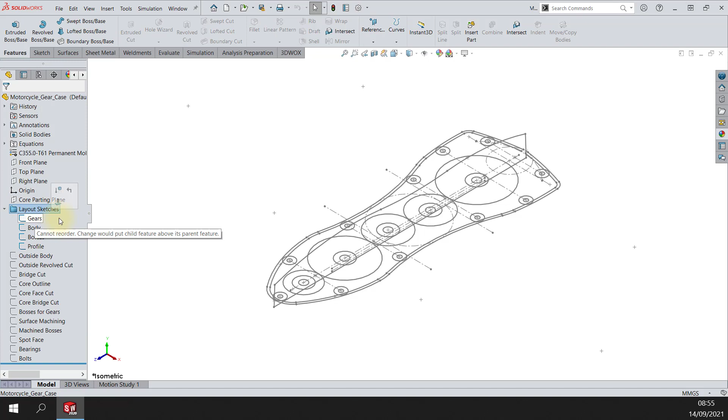So we start off with this motorcycle gear case. Here we have all the sketches done for us already. The first thing we'll do is go into this folder with the layout sketches and clear up the screen a little bit. We'll turn them off for a second while we're not using them, and then start creating a few of the profiles.

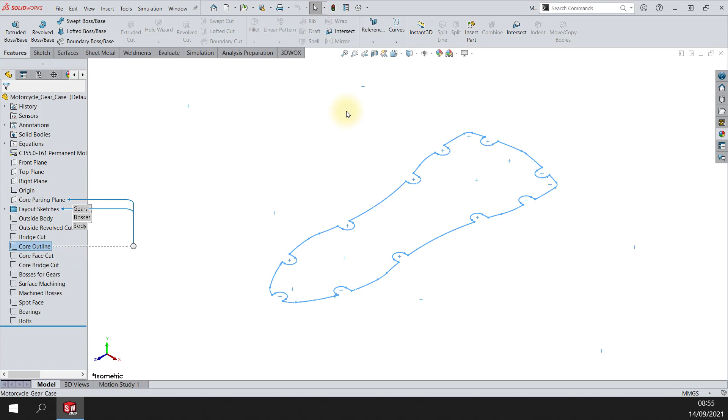So the first profile we're looking at is the core outline. If I do an extrude boss base on that, it's going to go in both directions, 50 mil upwards, with a 2 degree inward angle on that. If you flick through a few views, you can check to make sure you're going in the right direction with the angle.

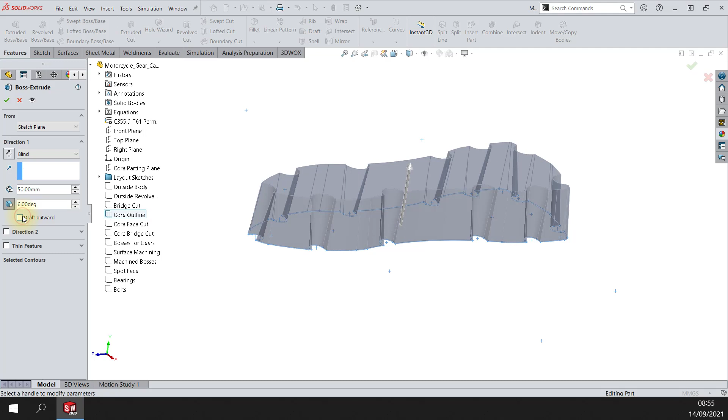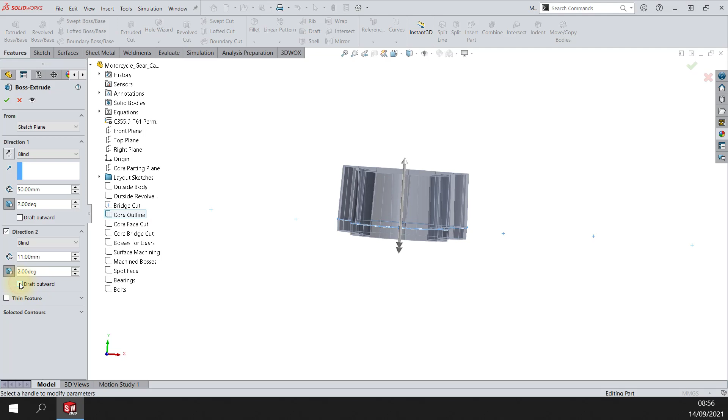2 degrees on that, and then the second direction is 11 millimeters with a 2 degree angle, and again that's an inward draft as well. So you can check and see for yourself. Inward draft, and that's that first little extrude done.

Next, we're going to do some fillets on the outside of that. We're going to apply 5 mil fillets. If I get the fillet command up and pick the edge, using the selection tool here, that'll help me pick the rest of them. You can see them all highlighted in magenta.

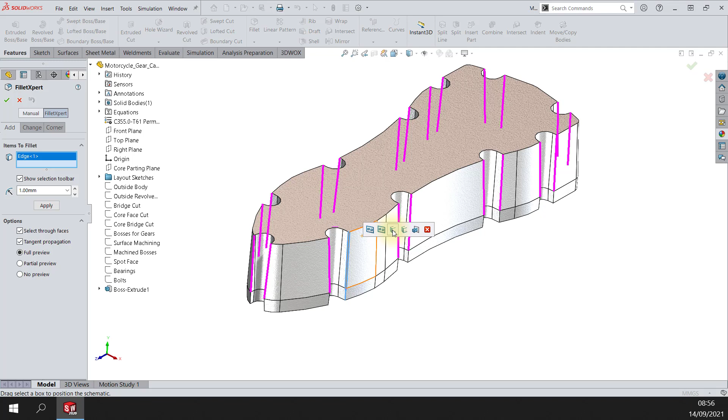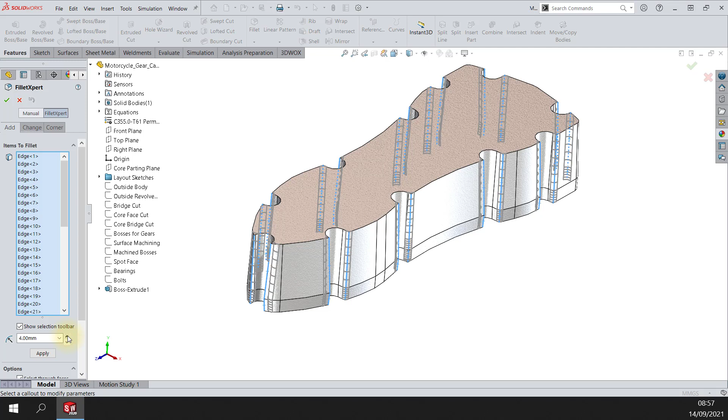So it picks those, and then I need to do the same on the bottom half of this. Select that, and again select those running around the bottom, and click OK on that. Sorry, just change my fillet to 5 mil before I do that, and apply it - that's those fillets around the outside done.

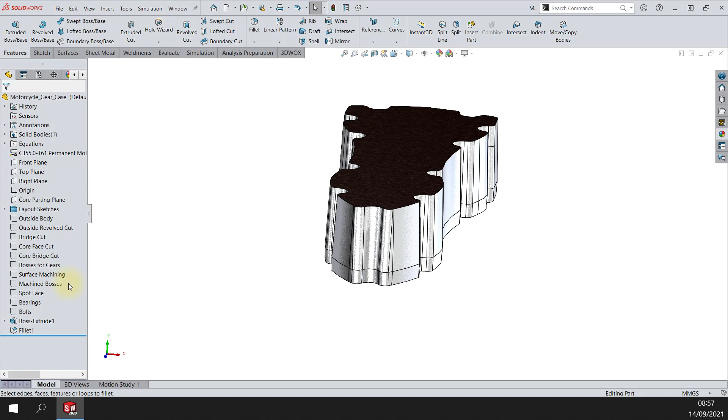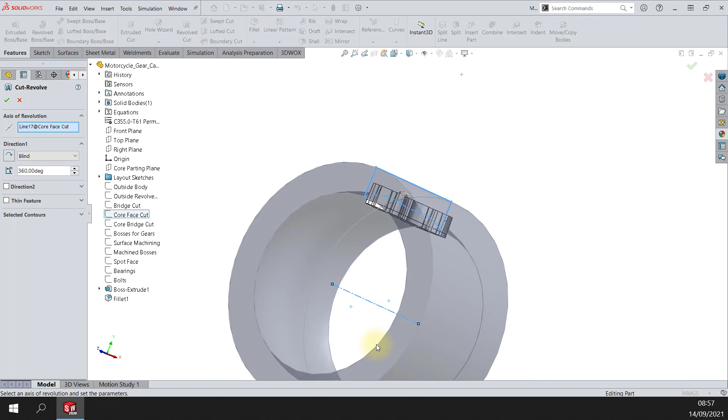Next we're going to do a little revolve cut across the top of this, using the face - the core face cut. We're going to revolve that around. You see it takes a fair whack off the top. You can pre-select the sketch and then do a revolve cut. It doesn't matter if you do it full 360 or 180 or anything, because it's not going to interfere with anything else. So, happy enough with that, click on that, and it gives me that revolve profile around the top.

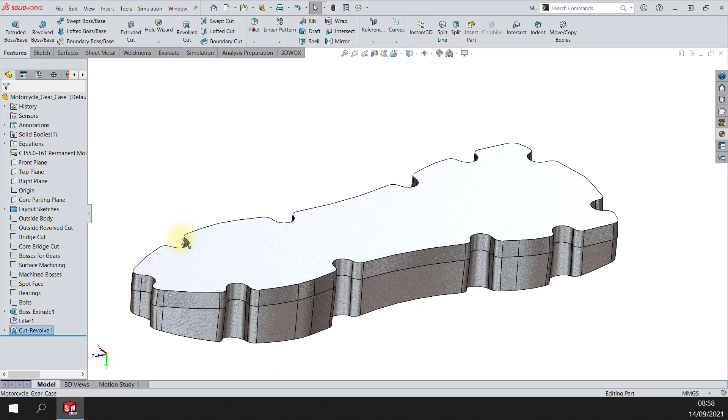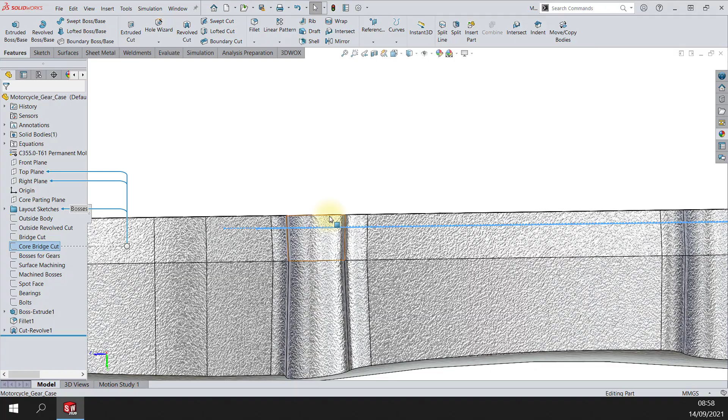Then flipping down on the bottom side, we're going to use the core bridge cut, which is buried into this a little bit. We're going to go in 2 directions - up this way and down a little bit. The upwards direction, and through all downwards, since this is now upside down. So the through all downwards is because I just flipped it. Looks like it's that upwards.

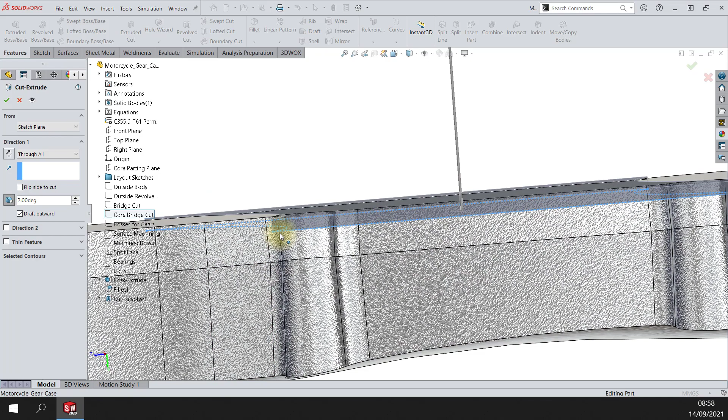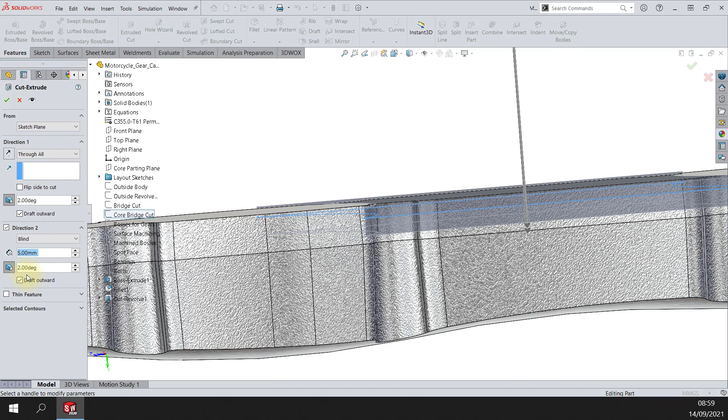So let's go to extruded cut, and that one is going to be through all, with a 2 degree draft, and this one's going to draft outwards. You can see that drafting outwards on that. Direction 2 then is going to be 5 mil, a blind cut, and again that's only 2 degrees. This one's going to be drafted inwards so you get a smooth line running up, all in line, so you're not going to get a step - you can just go straight in at that angle. Click OK, and that's the extruded cut done.

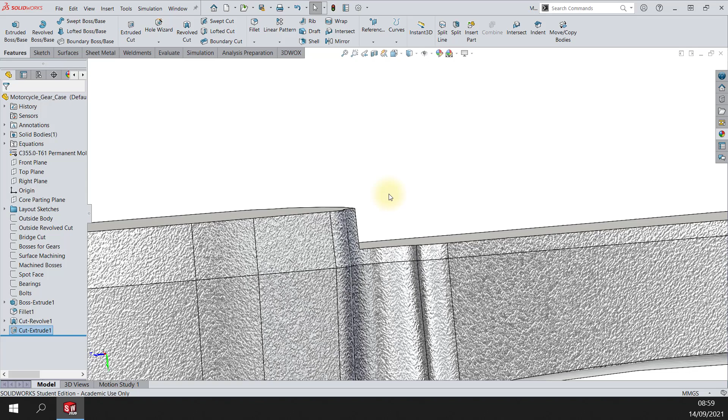So next, if I spin it around back to the top half of this, we're going to do the bosses for gears. These are buried into this as well, and again it's another extruded cut on that.

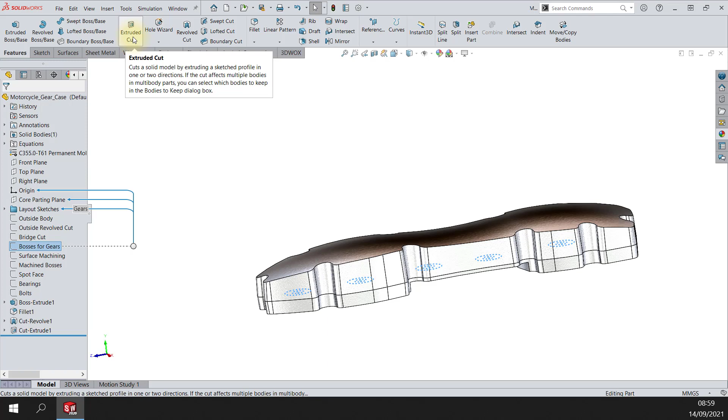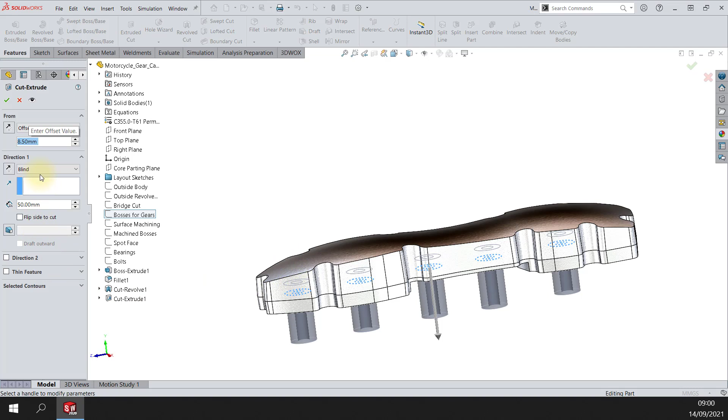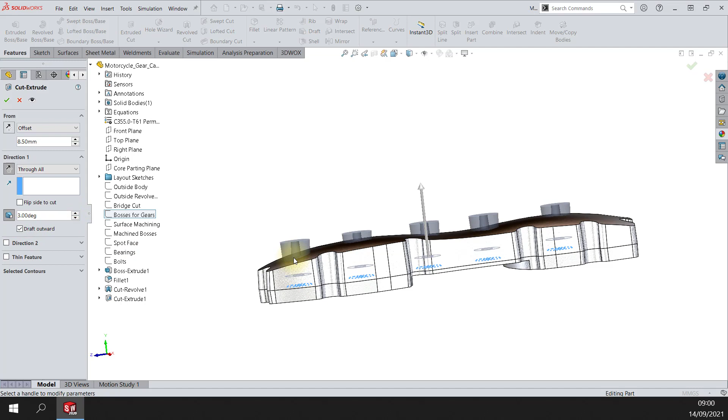So we're going to do an extruded cut, and it's going to be through all, but first it's going to be offset from this. So offset, at a distance of 8.5 there, and it's going up in that direction. Then I'm going to flip that, through all, because it's going to come up through that part in that direction. It's up 8.5 from where that is, but it's going to come up through all in that direction. And then there's a little draft on this as well, a draft of 3 degrees, and it's an outward draft, so make sure it's going outwards on that. Okay, so click on that.

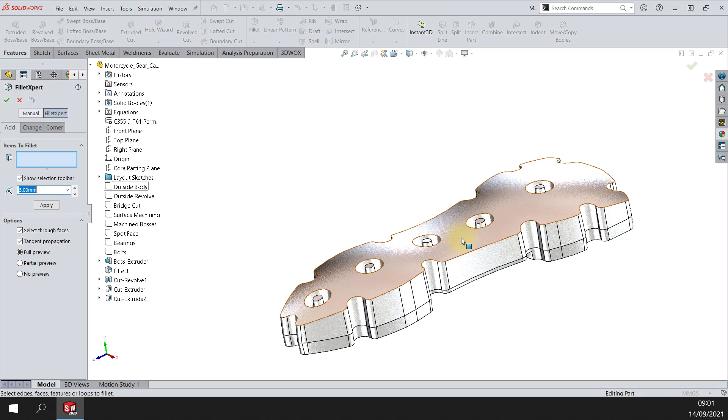It gives me that. Then coming down, we're looking at applying 5mm fillets to this. So we got the fillet command, 5mm fillets, and on the top face I think I can pick just a face and apply all those fillets to the top half of that. Yeah, so that gives me all that around the holes and all that as well. So selecting the face does that for me.

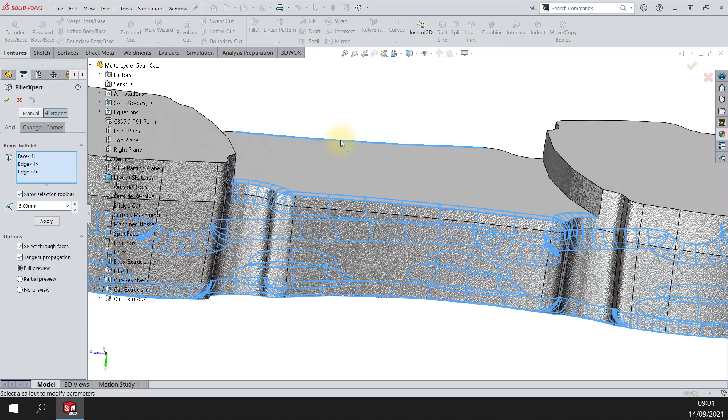And then the bottom side, we're going to just pick on the edge. So just make sure you get the edge on that, and do the same on the far side. You can always apply that and have a little look and check it out, and if not, you can right click on the feature and go back into it and add or delete any of the edges that you might have got wrong. So don't be afraid to do that, but I think that's okay.

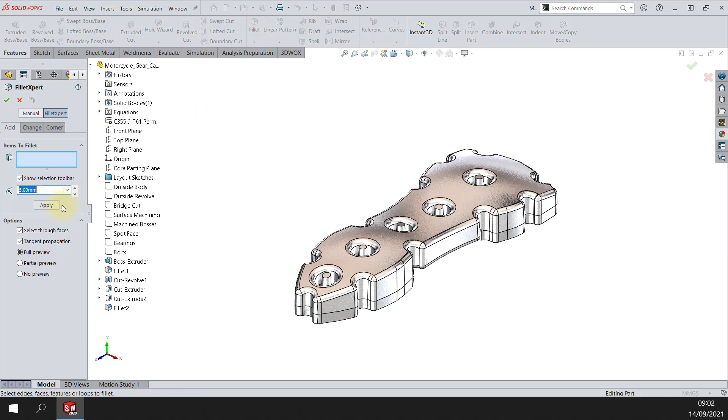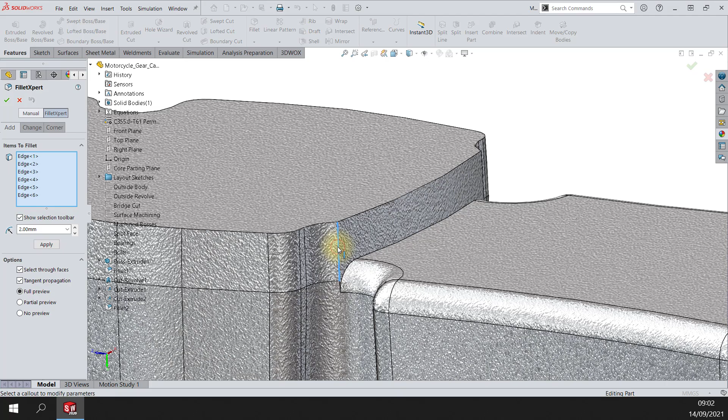Then moving down, we're going to apply a couple more 2mm fillets. So again, the fillet command. I just pick up those little edges, you can pick on the face or the edges as well, same difference. Then spin it around here, and we're going to just pick here on this. So there, and there. Apply that. That's my 2mm fillets on those.

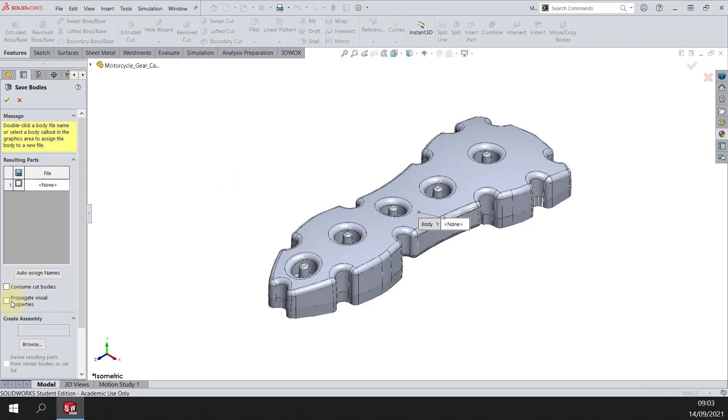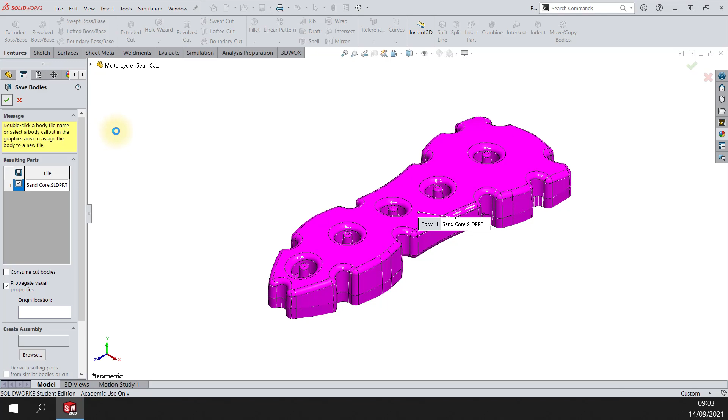It's magic to get it back on that. And that's that one. We're going to save that body and name it as Sand Core. I'll actually name it here as well, Sand Core. And we're going to save that body, so save bodies, and we're going to save it out. Don't forget to propagate visual properties as well. We're going to save it out as Sand Core, and you can see it's already got the name in there. That's what I've done before. So I'll replace that one with that, and we've got that Sand Core. Click OK on that, and that's that one done.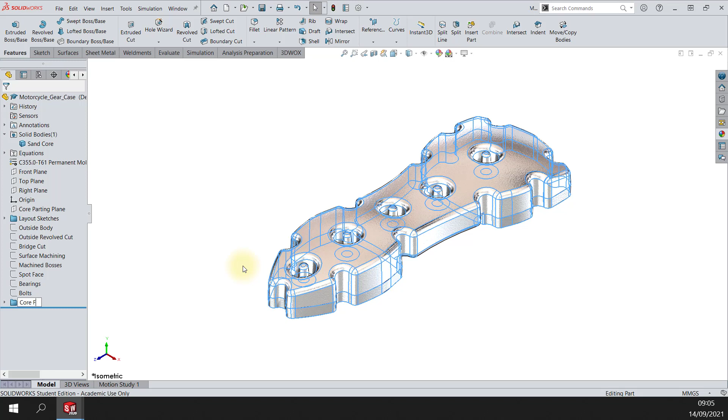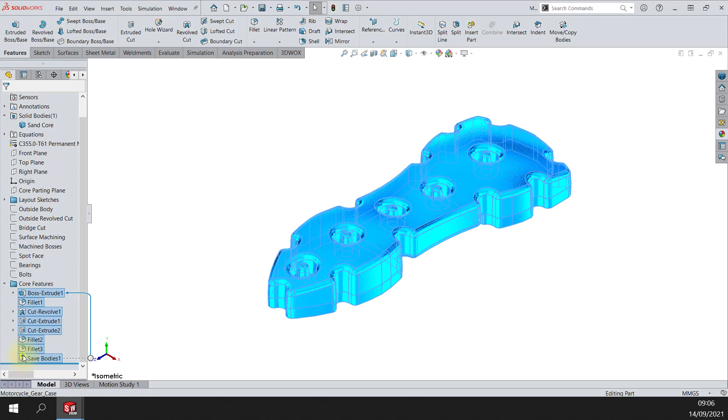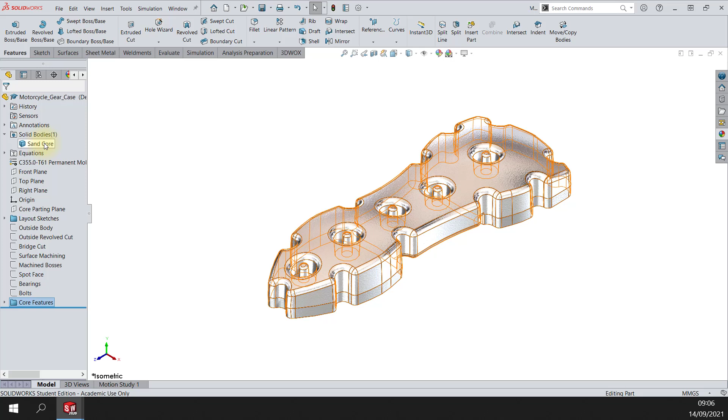So once we've got all them done, we're going to pop all them into a little folder. If I just select all those items and right click and add to new folder, and we're going to call this one core features. So there we go, pop all them into that. That keeps all them in there safe. I'm going to pop in with that core features, and I'm going to just turn off all of those, hide all those features there. So let's hide the sand core now, that clears that and gets it out of the way.

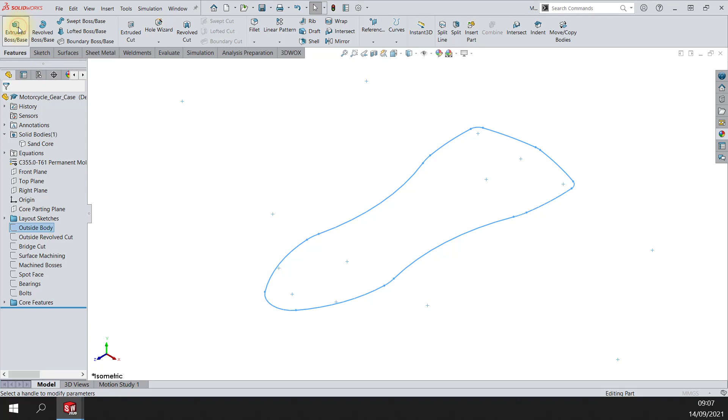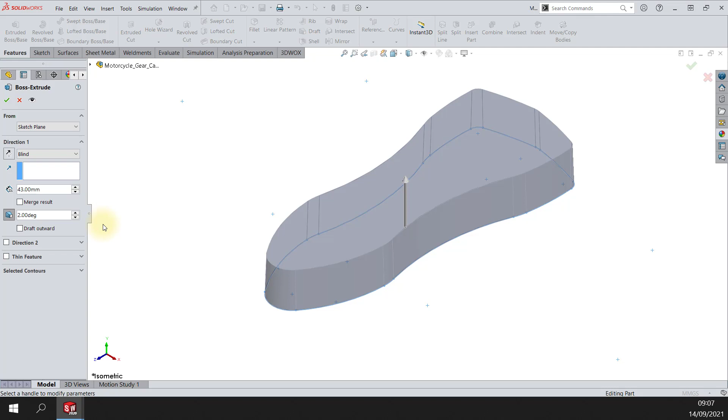So next then we'll have a little look at creating the next part, so it's the outside body. We're going to extrude that again, and it's 43 upwards, so 43 up. And again it's a draft angle of 2 degrees on that, and it's draft inwards. Then the direction 2 is 11 mil, so 11 mil units on that. This one's going to be draft outwards, so it's all going in the one direction, draft inward on the up direction and outward on the down direction.

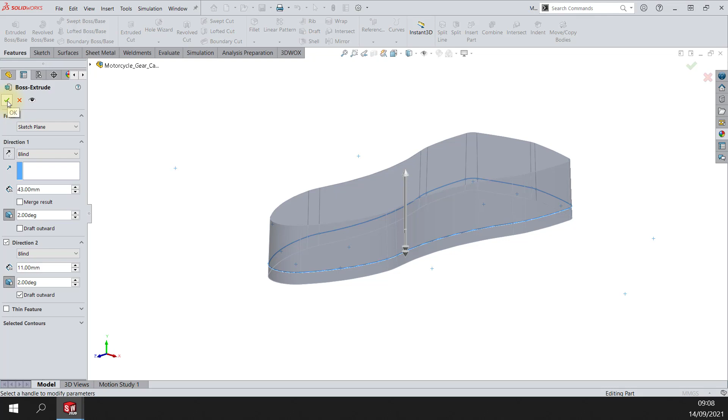Make sure you've cleared the merge result box if necessary, so you don't want to merge them with the other solid. So click OK on that, and that gets that one done. And again we're going to do our little outside revolve cut on that. So I can pre-select that, do a revolve cut, same story as the last time. Doesn't matter if we do 360 on it, won't affect anything else. So that's us done at that.

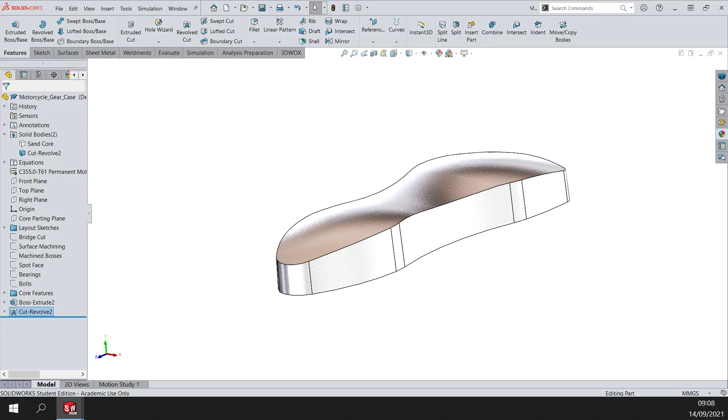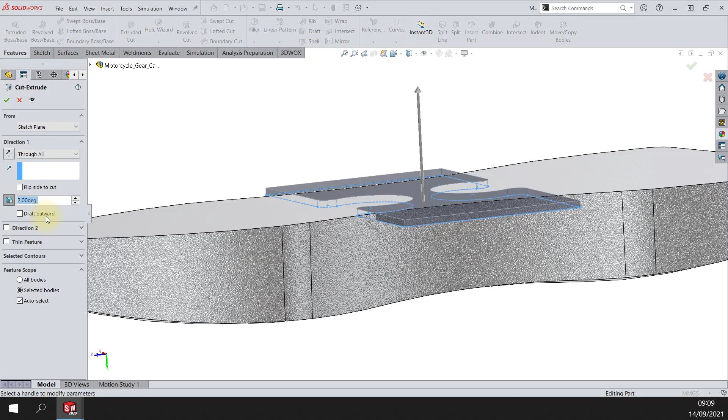Spin it around, and we've got a bridge cut then. Again it's kind of buried into it, so we've got a couple of different directions to go. So I'm going to go through all in that direction, and again a draft, it's a 2 degrees draft here, and it's a draft outwards on that. So let's check that, see that? So just check that you're drafting outwards.

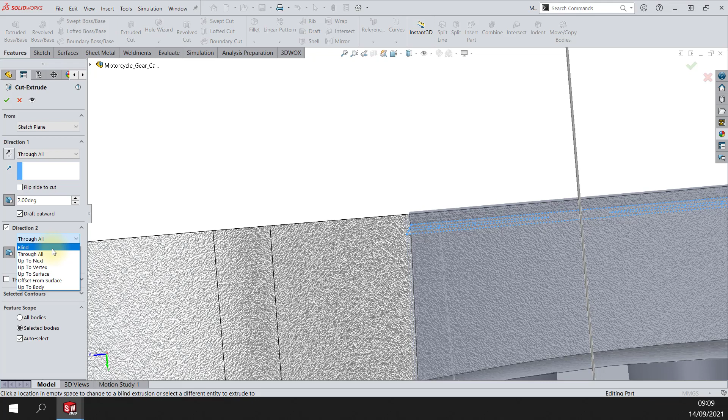Direction 2 then is a 2 mil cut, so it's blind 2 mil cut, and again it's draft, this time it's draft inwards. Again, you've got to keep it going in the same line. That one's going out, that one's going in, so you get the same angle of approach, if you like, on that. So click OK on that.

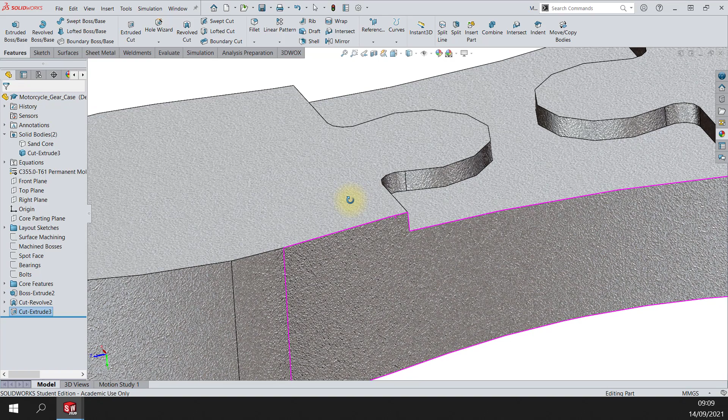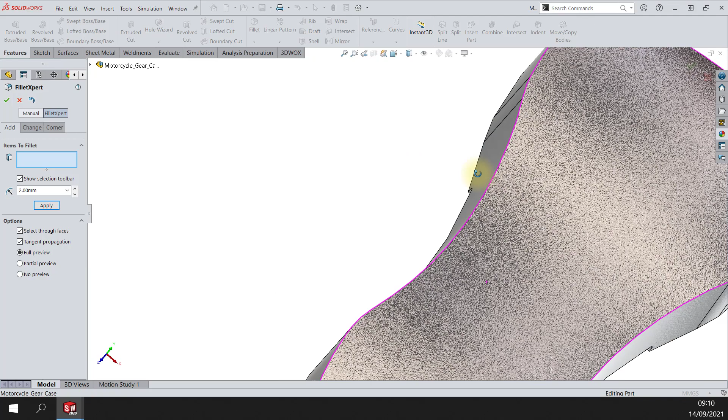Then coming down, we're going to apply a little 2 mil fillet on that. So fillet 2 mil, and we're going to apply that to this edge and this edge. Apply that on that, and in actual fact, yeah, we're going to apply an 8 mil fillet on the top edge here as well. So make that 8 mil, and again we can create the face and apply that, and that's that bit done. And we're going to save that body as body pattern, so I can use that.

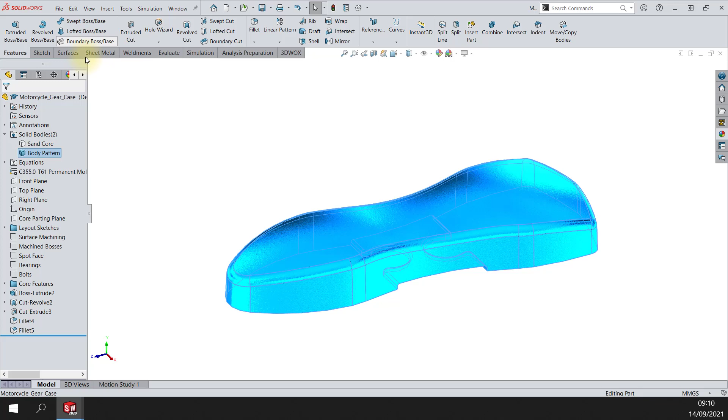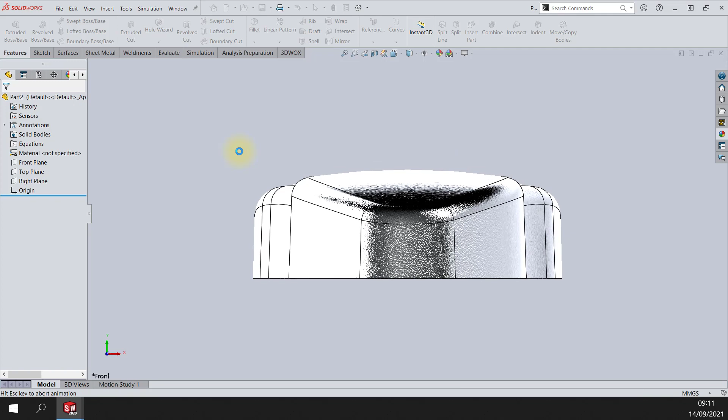Pattern, and we can save that one out then. So save bodies and body pattern. Again, I've done this before, so I have it saved. Don't forget the visual as well before you finally click it, and away you go. And that's that done, and that's that saved out.

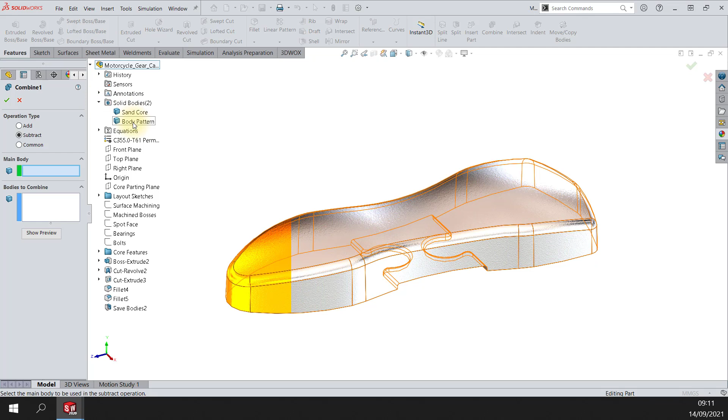So the next thing is we're going to use our combine command. I'm going to turn on both inside and outside, so you've got the sand core and you've got the body pattern. Using the combine command, we're going to subtract the main body. You might want to come up to this for handiness. So main body is the body pattern, and then bodies to combine, and you're going to subtract it, subtracting the core from that. You can see a little preview just to make sure that looks all right. You can see it looks okay, so we can click OK, and that removes all that material from the inside, and that's that little bit.

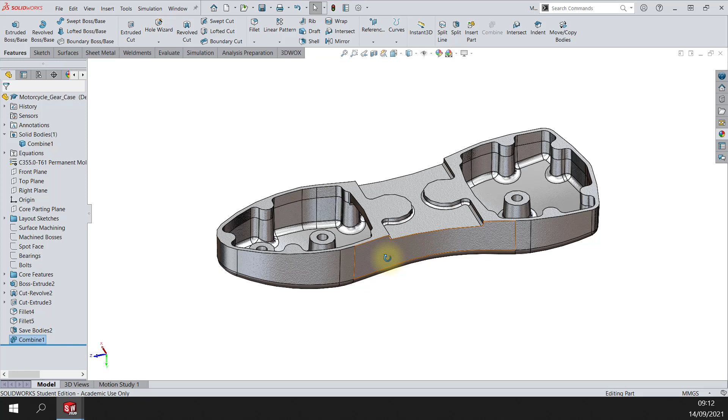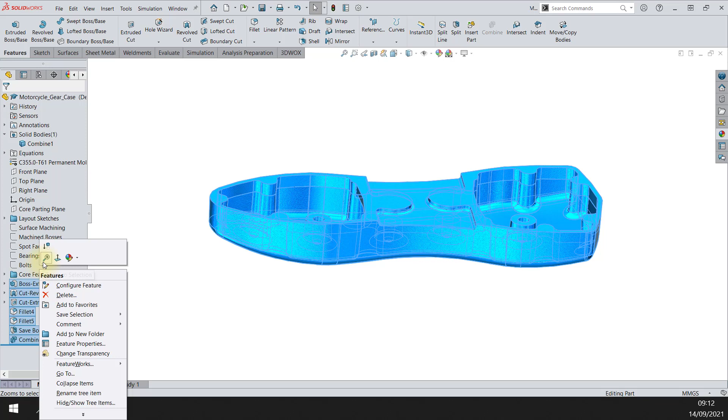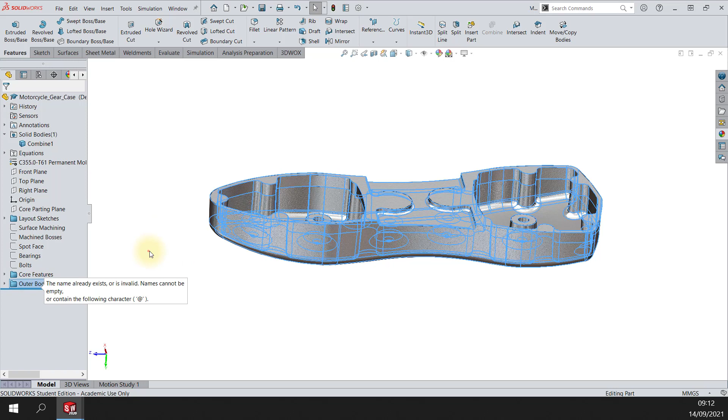And the last little bit then is the machining of it. Again, like we did with the core features, we can create a little folder for those and call it a new folder, and we can call that one main body or outside body. Again, just to keep things organized, that kind of keeps everything into one folder just to tidy things up a bit.

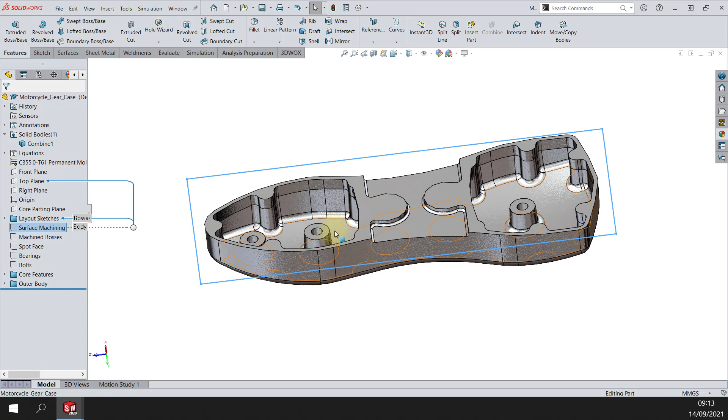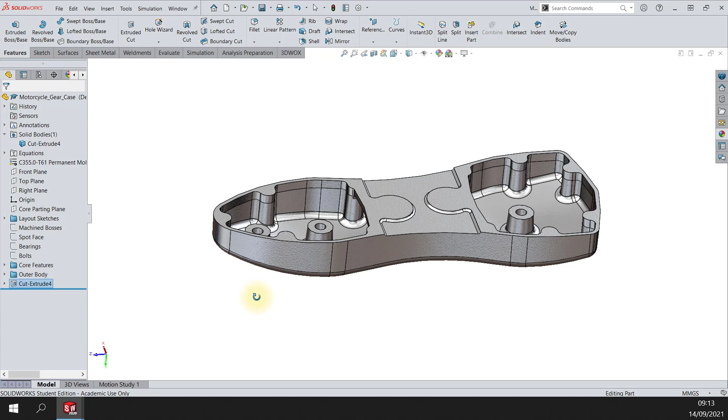So next then we're going to do a little surface machining on that, just a little bit down. If you're going to cast this, it'd be rough enough, and if you want that to seat properly, create maybe a seal with a gasket, you'd have to machine this one. So surface machining, and we're just basically going to do an extrude cut through in that direction, and that machines that sort of top surface, so that indicates the machining of the top surface. You can create a drawing of these little items as well.

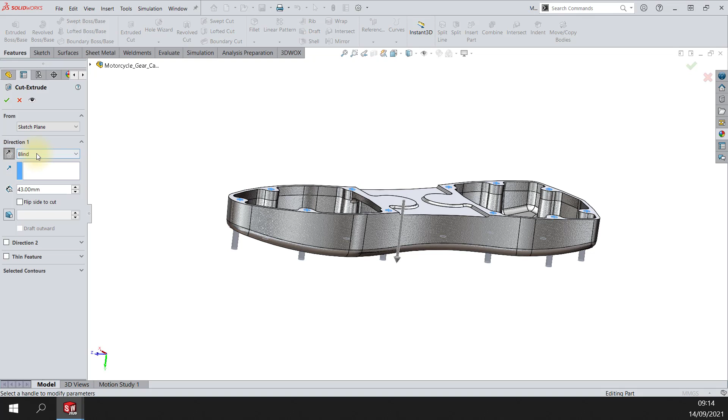The next one then is the machined bosses. So if we just again extrude cut on that, and that's the opposite direction, and we're going to go through all. So that's just the holes for the screw, the clearance holes for the screw.

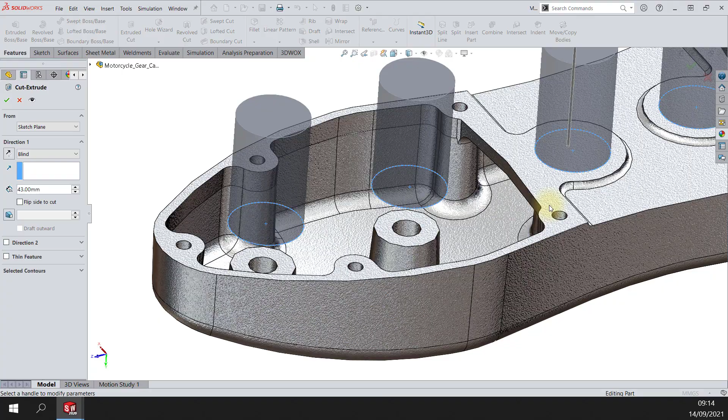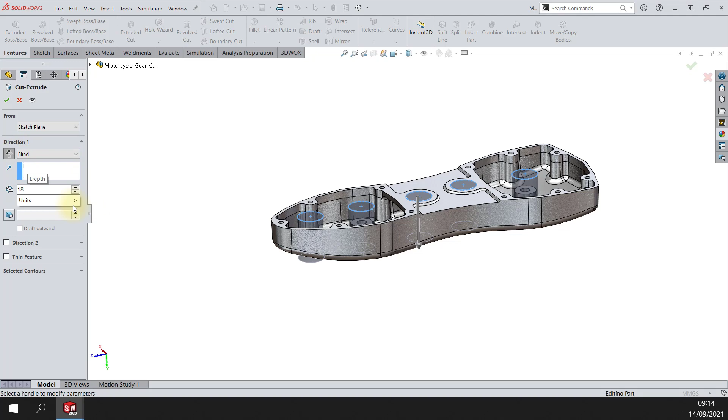And then spot face is the next one. Again, extrude cut on that, and this one is actually going to create a sort of flat surface for the part to rest on. But in this instance, it's actually going to create a hole here as well through, but create a flat surface. So there's one of those hidden underneath that little lip there too. We can flip the direction, and it's actually an 18 mil deep cut, and we click OK, so that cuts through. You see it creates those holes and kind of creates the top of that. Again, you can go in and see it's keeping the cast finish, so you can go in and modify those finishes, do that later to tidy it up if we wished, just to make sure it looks like a machined part rather than just cast like that.

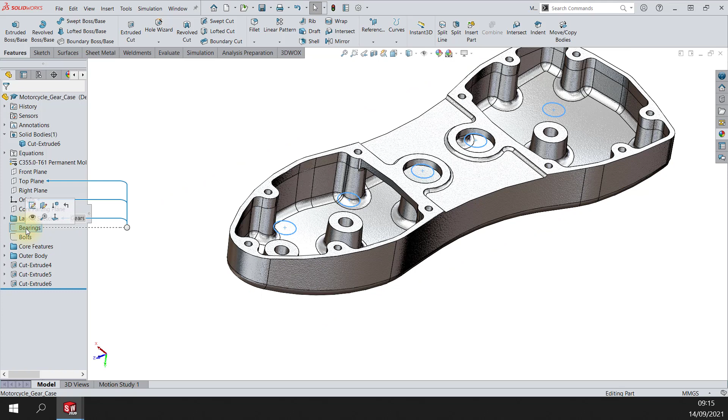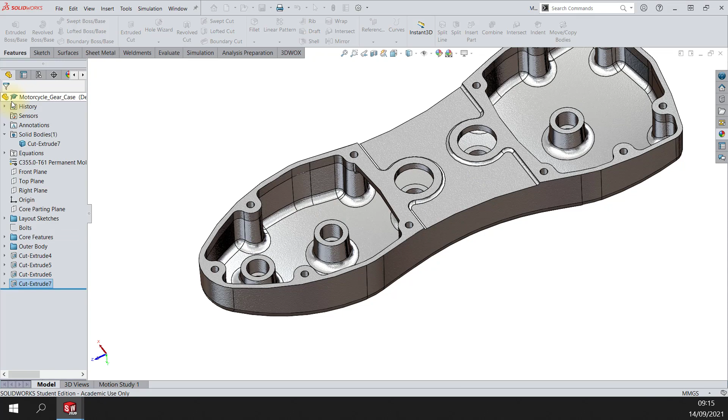So this is that. The next one then is the little blind cut for the bearings. So there's a little bearings, and again extrude cut, down, and the distance then is 30.5, and again just for the bearing, it's going to create a nice sort of finish for the bearing to sit in there. Again the finish is a bit rough so it looks like a cast, but as I said, we can fix that up.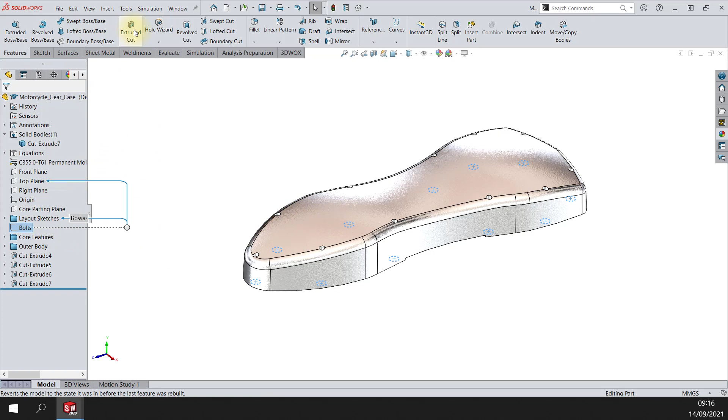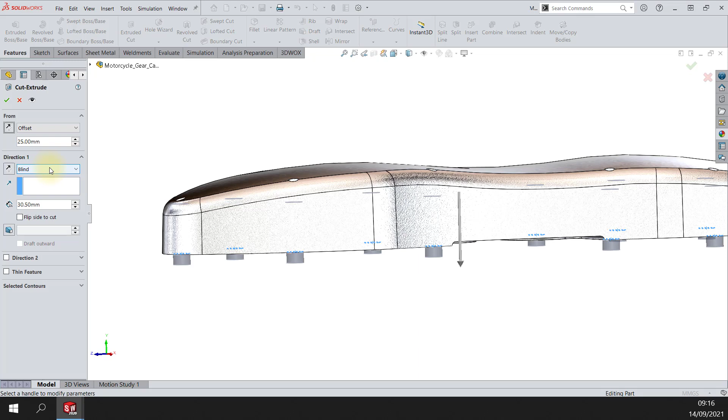Next one then is the counterbore holes for here, for our bolts. Again, extrude cut, and on this occasion we're going to offset this one 25 mil. So 25 mil, you kind of look at that, 25 mil from there, and it's going to again be a through all cut, so we just need to reverse that. So what that's doing is creating a 25 mil distance from there all the way around, so that the screw lengths are all the same.

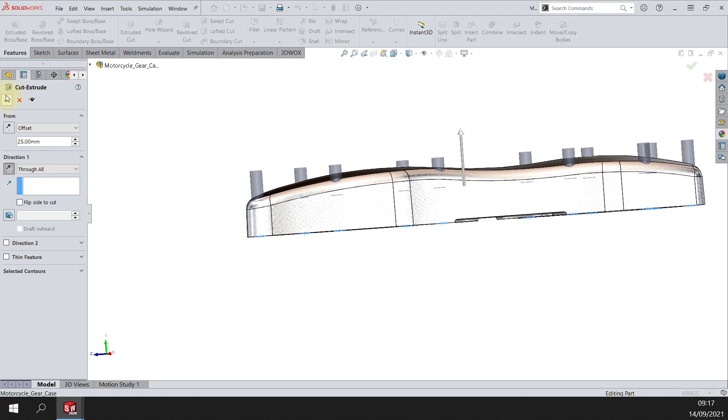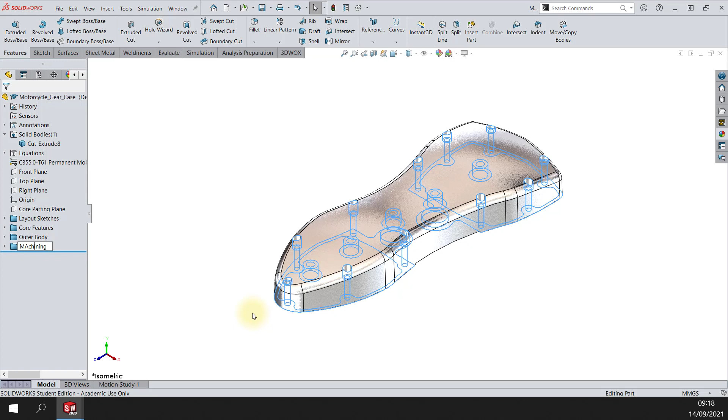So if you went around it, you'd see that the heads of the screws all seat the same distance away from the bottom edge, so that you don't need any special screws, that they're all the same length screw. So if I do extrude cut on that, take that, that gives me my little counterbore for it to sit in, and as I say, they'll all be the same length because they all come the same distance from the underside. And again, if you wanted, you could select all those and create a new folder, and you can call it machining. So that's your machining section.

Okay, so that's that part completed. You can save that and close that file then, and that's that part complete.